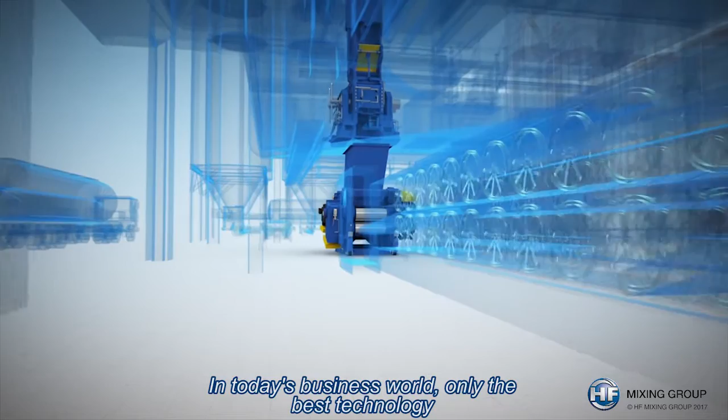In today's business world, only the best technology will ensure you stand out from the competition.

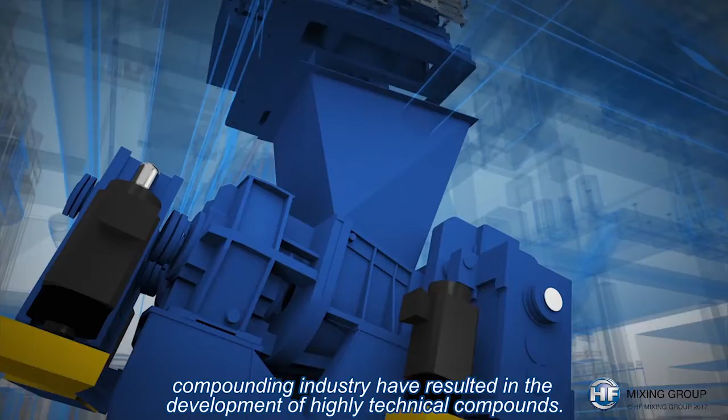Since the internal mixer was developed in 1916, the demanding requirements of the compounding industry have resulted in the development of highly technical compounds. HF Mixing Group continuously developed the Banbury,

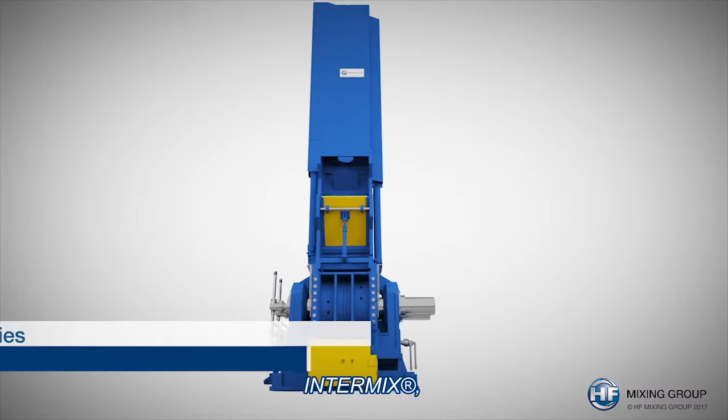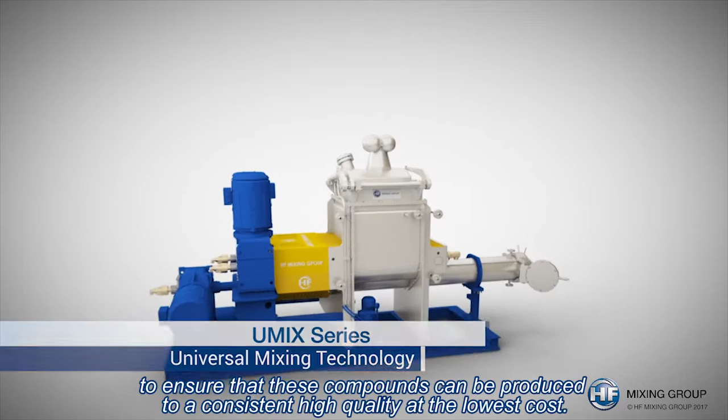Intermix, Tandem, and Universal Mixer UMIX to ensure that these compounds can be produced to a consistent high quality at the lowest cost.

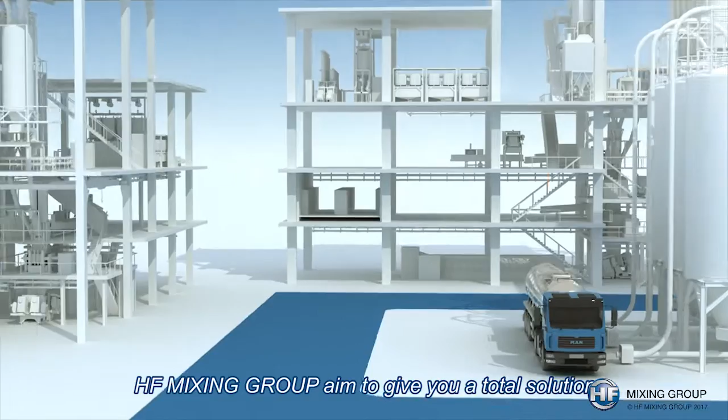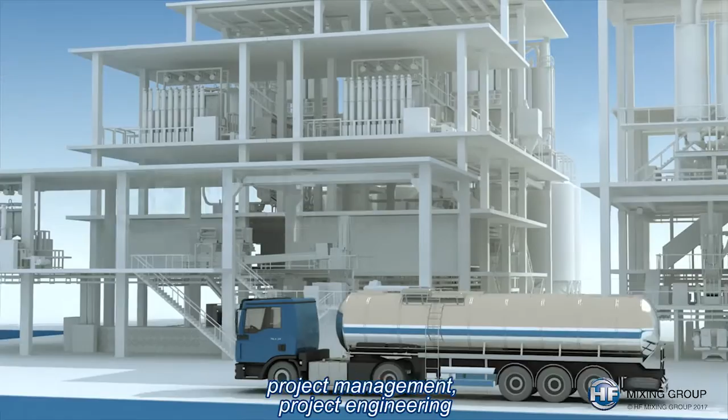HF Mixing Group aimed to give you a total solution for your mixing room requirements, from the best equipment for each individual step of the process through financing, project management, project engineering, integrated automation, and site coordination.

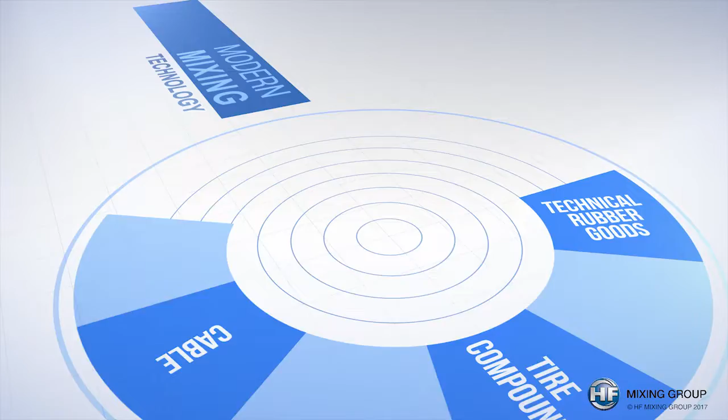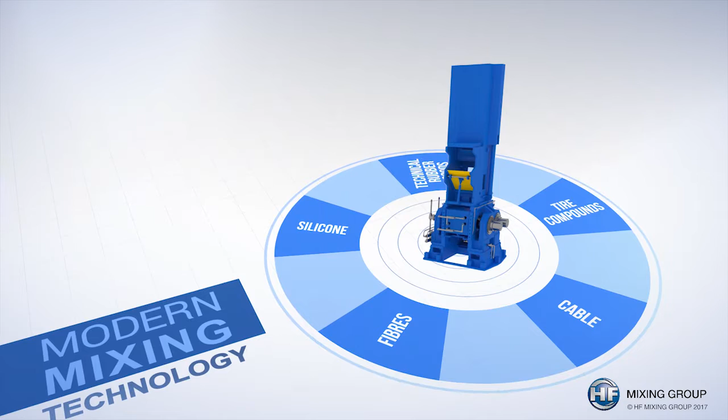Whether for the tire industry, technical rubber goods, cable and thermoplastic applications, or silicone compound layouts equipped with universal mixers, the central point of any mixing room layout is modern mixing technology.

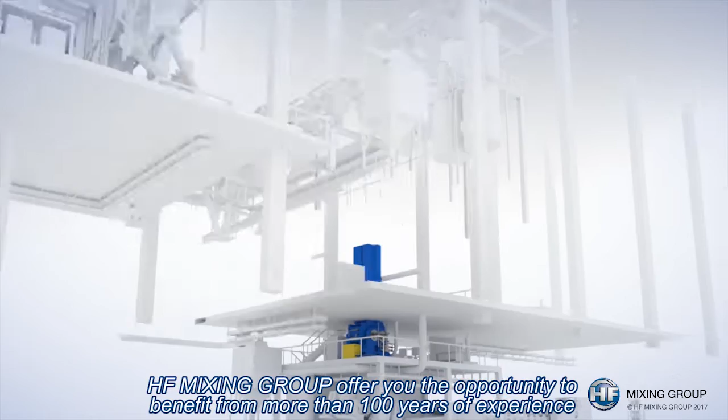HF Mixing Group offer you the opportunity to benefit from more than 100 years of experience in building the heart of mixing procedures, the mixer.

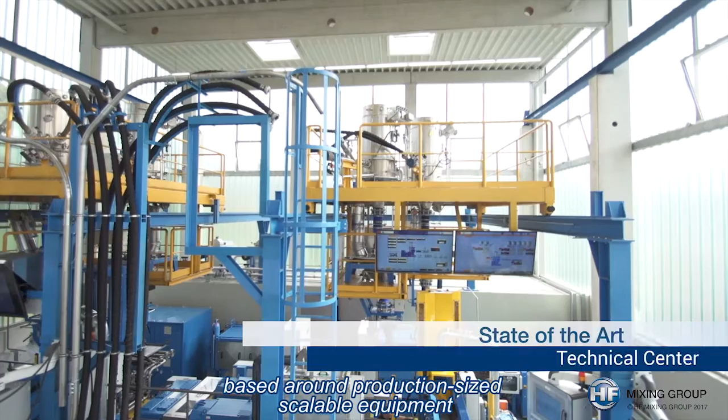Our state-of-the-art technical center in Freudenberg, Germany, based around production-size scalable equipment, can precisely identify and confirm the mixing technologies for your application.

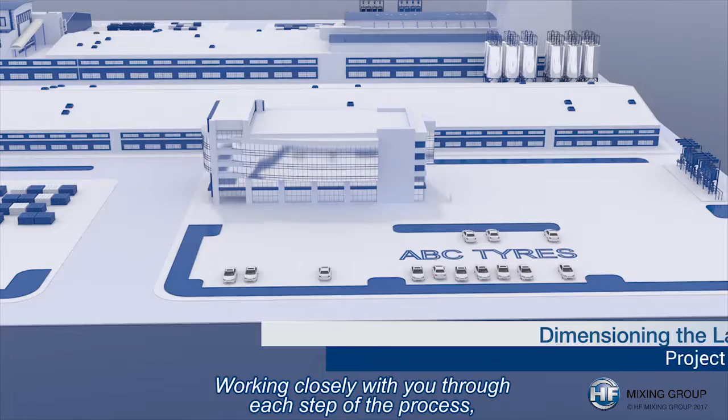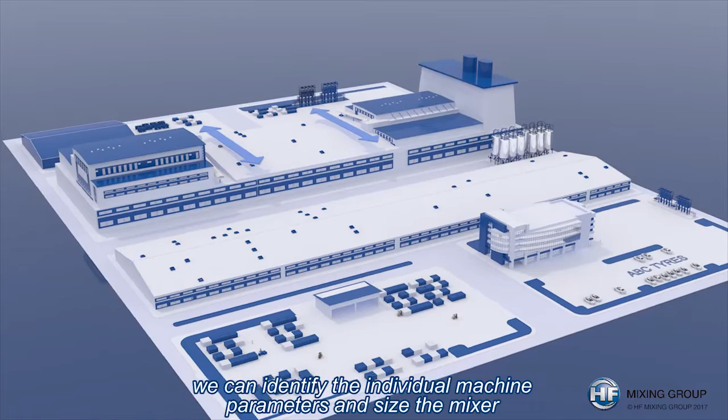Working closely with you through each step of the process, from raw material delivery to finished compound, number of passes and the respective volumes for your materials, we can identify the individual machine parameters and size the mixer, as well as the complete mixing room.

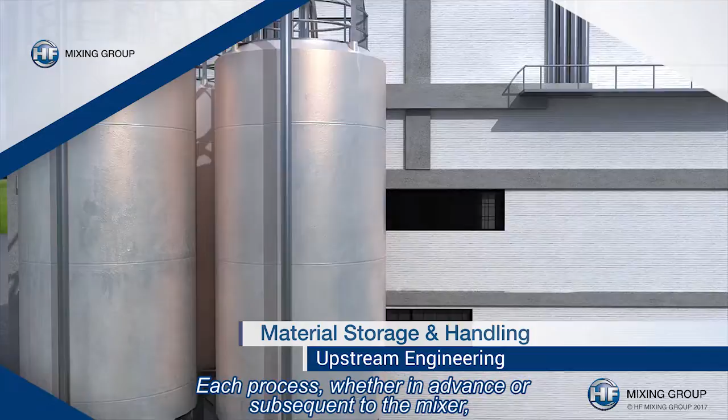Dimensioning the mixer by inspection of the process defines the environment and the specific requirements for up and downstream equipment. Each process, whether in advance or subsequent to the mixer, should be limited by the frequency of mixing.

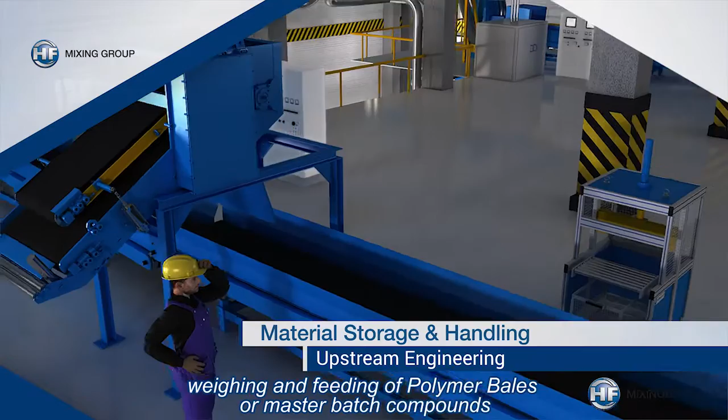Raw material silos, small components, oil handling, weighing and feeding of polymer bales or master batch compounds. The aim of upstream engineering is to analyze the characteristics of the different raw materials and to determine the best solution for a careful raw material handling system.

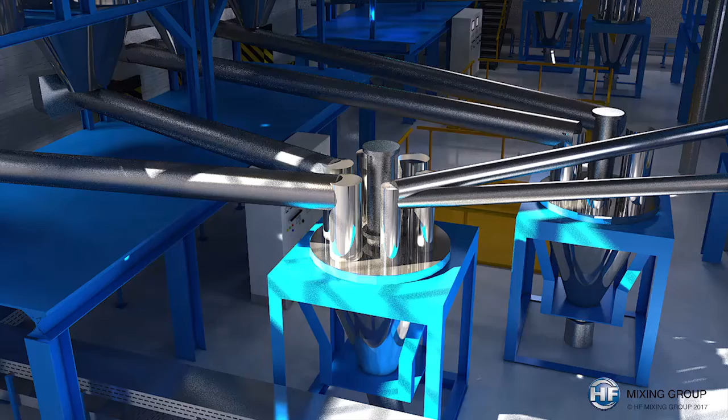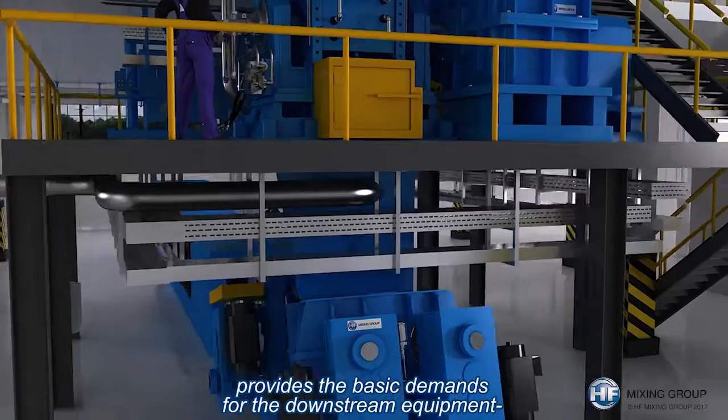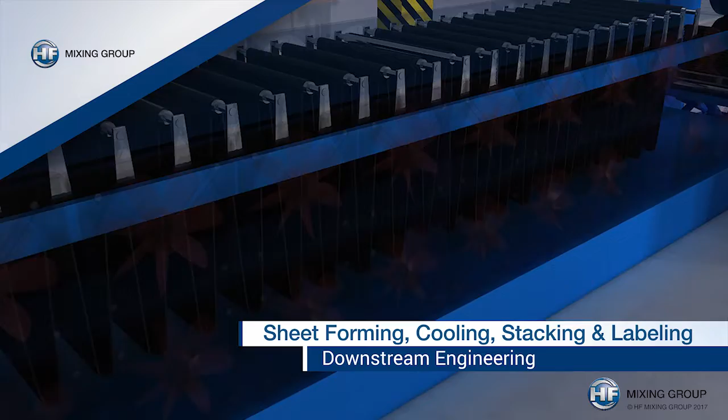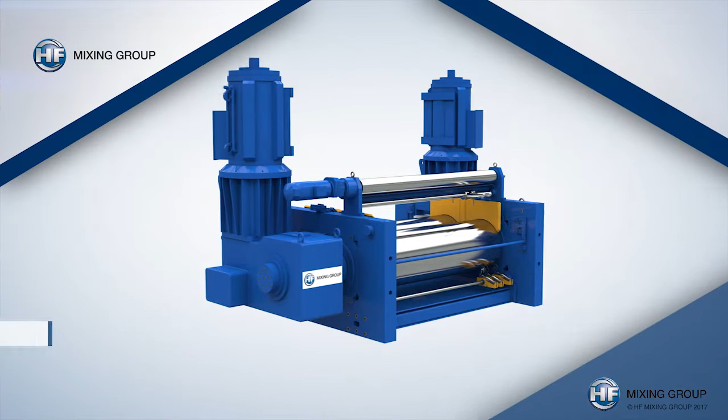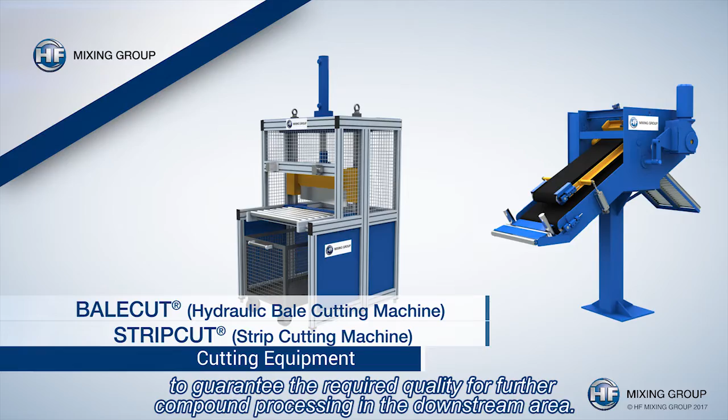HF Mixing Group supply high-class mixing mills, twin and single-screw extruders, batch-off units, and pelletizing solutions to guarantee the required quality for further compound processing in the downstream area.

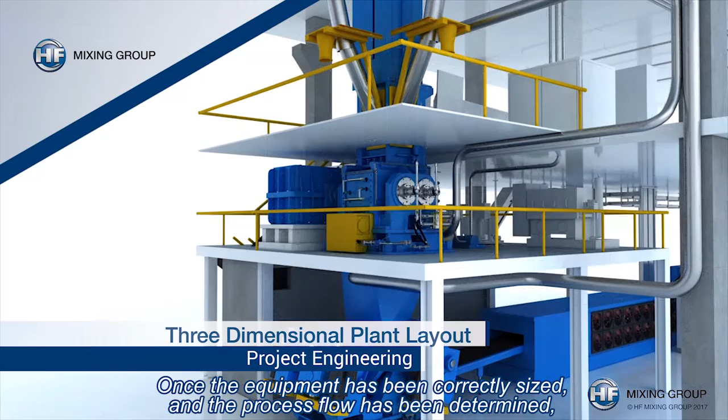Once the equipment has been correctly sized and the process flow has been determined, we can look at the line layout in 3 dimensions so that the process can be easily understood by everyone involved.

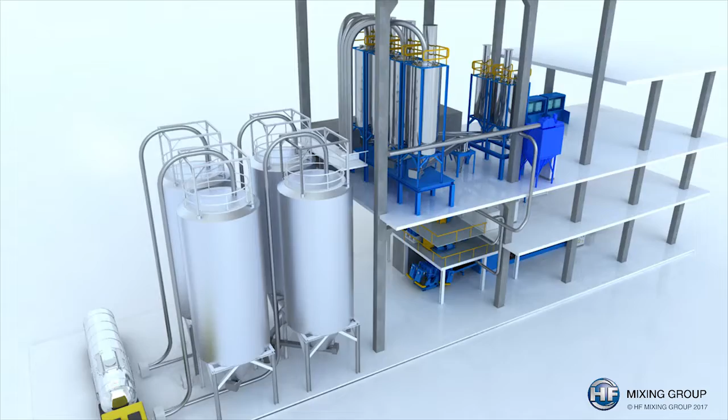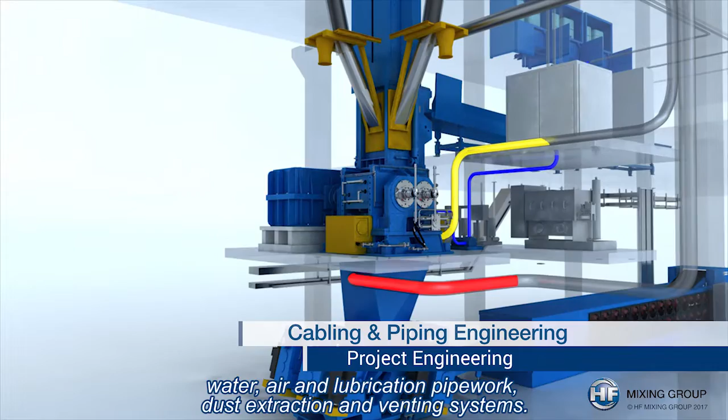Once the engineering of the basic equipment and mixing room layout is complete, we can start to look at engineering the cable trays, water, air and lubrication pipework, dust extraction, and venting systems. The basic engineering work linking each aspect of the mixing line is now complete.

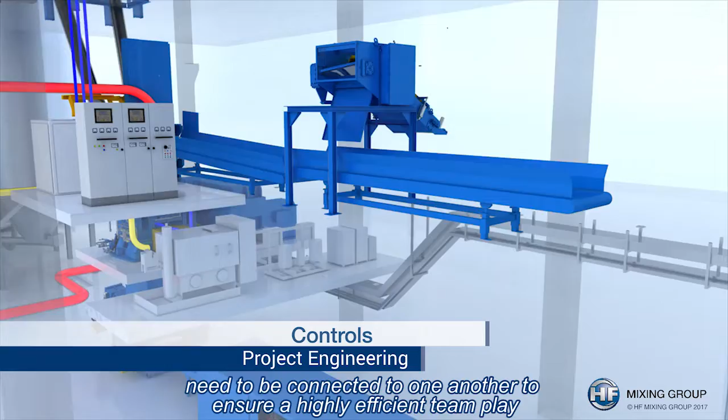Several PLCs, each responsible for the control of a different process, need to be connected to one another to ensure a highly efficient team play between the different machines and equipment in the mixing room areas.

Each piece of the puzzle of an integrated automation solution needs to be placed in the production process at the correct level. HF Mixing Group provides, through Advise, a standard parameter-driven software package giving you the opportunity to control each level of the process with pre-engineered software solutions, from the equipment to the interface to any well-known or customer-specific ERP systems.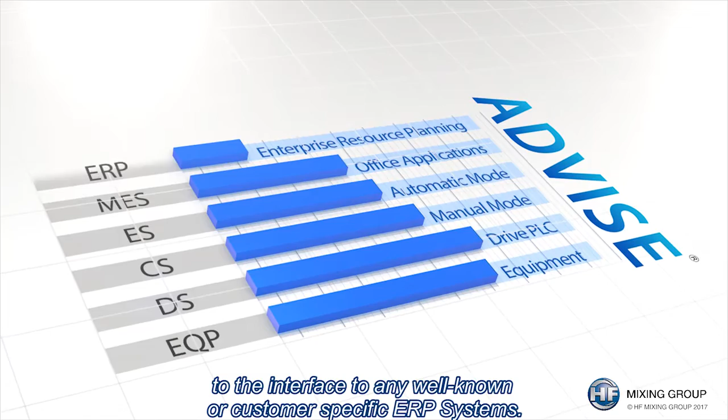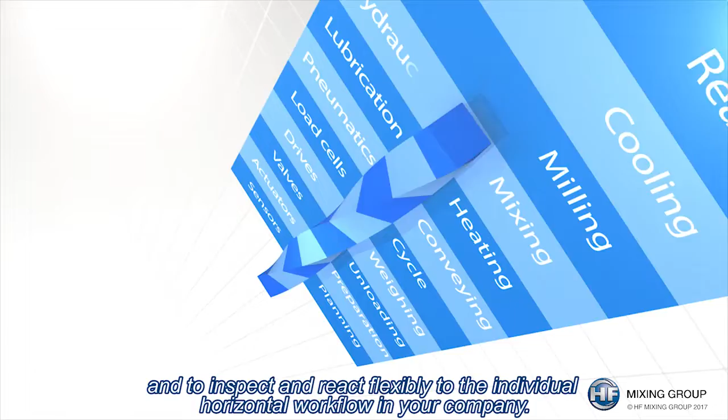The goal of the HF Advise system is to structure the process of automation based on defined vertical control levels and to inspect and react flexibly to the individual horizontal workflow in your company.

More than 40 years of experience in software solutions for mixing processes gives us the ability to offer you a customized system based on specific rubber industry knowledge. Linking each machine and process to give total plant control can be summarized in 3 words: concept, connect, and control.

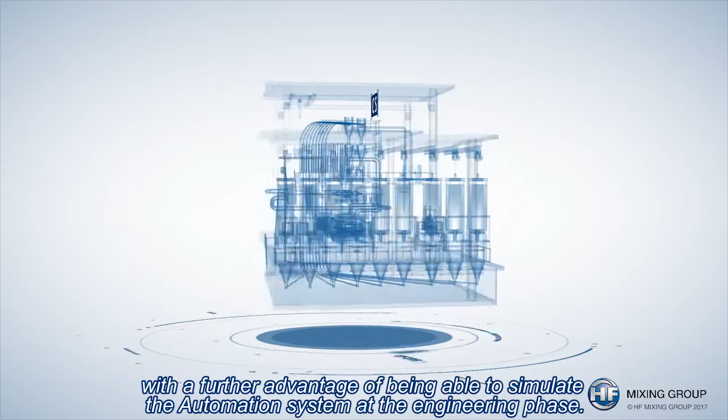Using the HF Mixing Group as a single main contractor allows the interfaces between the different processes and equipment to be standardized and effectively less costly, with a further advantage of being able to simulate the automation system at the engineering phase. This ultimately leads to a shortened on-site startup period and earlier production.

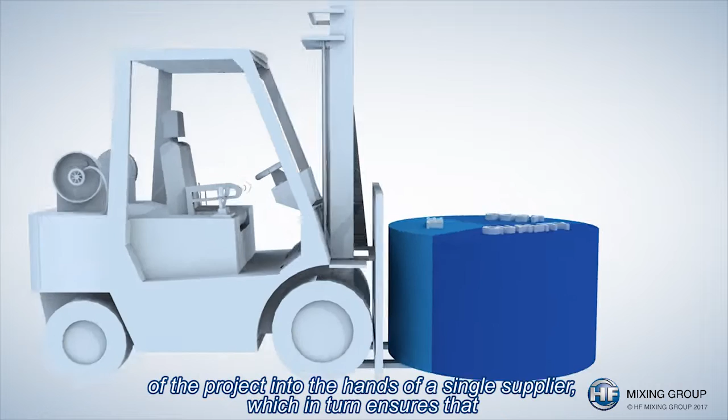Project management brings all the required resources, time, costs, and quality of the project into the hands of a single supplier, which in turn ensures that we aren't just planning the work, but that we are working the plan.

Each step of the project must be examined in detail and may require a multitude of disciplines: mechanical, hydraulic, electronic, programming, organization, etc.

Project management ensures that costs, quality, and time are carefully kept in focus and that the results are predictable and reliable.

Providing assistance in analyzing your mixing room, project management and engineering, including integrated automation, training, site coordination through installation and startup, and finally, international certification. These are the goals of HF Mixing Group, the world's leading producer of equipment for high-quality mixing solutions.

Furthermore, the HF Mixing Group offer already pre-engineered solutions for several mixing line layouts, master remill and final production, technical rubber, cable and thermoplastic compounds, or solutions for production of silicone compounds.

It would give us great pleasure to start the discussion with you about your upcoming mixing room projects. HF Mixing Group, your partner for mixing room turnkey projects.